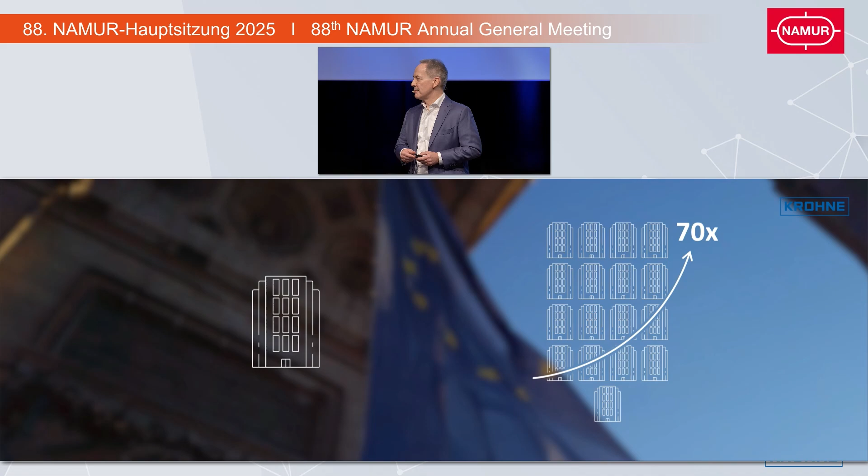Our innovative capacity is lagging behind. Compared to its GDP, the EU only invests half as much as the United States, for example. As a result, 17 times as many large corporations were created in the US as in the EU over the last 50 years, with their market capitalization 70 times higher.

And what's behind this difference? A greater willingness to take risks. What we need here is a fail-fast mentality that allows for rapid iterations and experiments, rather than trying to create rules for even the most minute detail in advance. Unfortunately, a safety-first mindset, when exaggerated, can lead to bureaucracy, which slows us down.

The EU is the leader in regulation. 13,000 new regulations were issued since 2019, compared to 3,000 in the US. What we need is significantly more venture capital and a culture that accepts entrepreneurship and failure as a learning process instead of stigmatizing every mistake.

And finally, we need to make sure that the excellence we have in research is tied in much more closely with the industry, so that we can put innovative ideas onto the road much quicker. What can we do specifically in the process industry, Dagmar, to ensure long-term productivity and profitability in Europe?

In the process industry, we need to invest intelligently and purposefully in digitalization and AI-supported process optimization, leveraging the existing wealth of data. This will enable us to increase the efficiency of our plants in Europe and offset at least part of the higher energy costs.

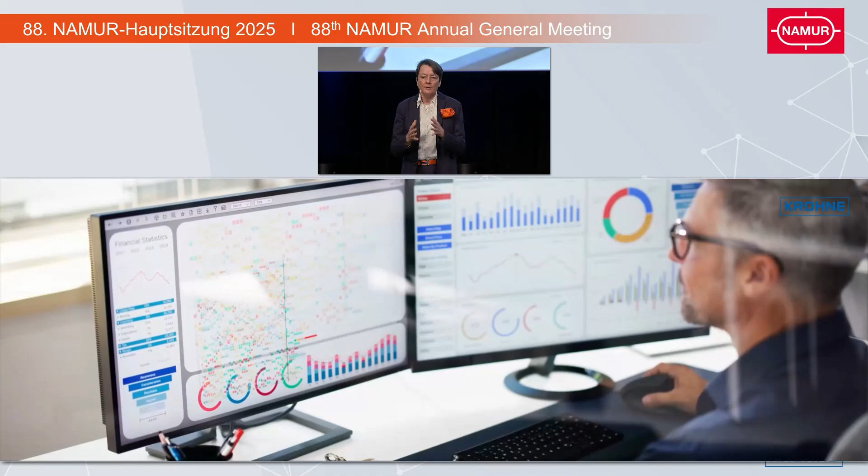Another way smart systems promote efficiency and productivity is by freeing up expert capacity, by relieving specialists from routine and bureaucratic tasks, so that they can concentrate on activities that create value and increase productivity.

Modern systems afford us an opportunity to break down silos by improving data transparency, making data visible from production to administration. They create a consistent basis for communication, where previously there were many different isolated solutions. Of course, AI is not the cure-all, but it can certainly help.

What exactly do we have to do? We, as companies, need to strengthen our innovative capabilities.

One way to do this is by forming strong partnerships between companies and research institutions, as KROHNE does, along with players such as Evonik, Lanxess and many others. And one of the most powerful partnerships is NAMUR.

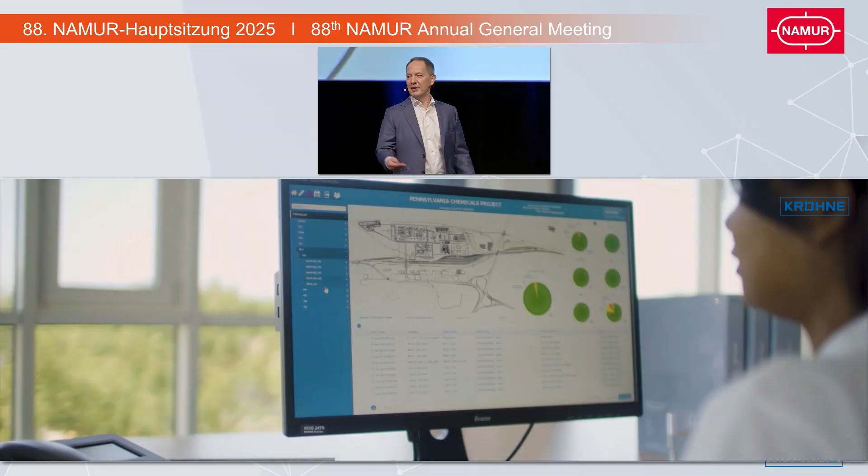The standards we develop together are invaluable. Just think of modular setups with standardized interfaces according to NAMUR MTP, or networking in the field with the help of the advanced physical layer. Without APL, the NAMUR open architecture really isn't much fun.

However, with all these technologies, we're still far from being autonomous. What milestones, Dagmar, do we need to achieve for autonomous operation? We discussed this with a number of representatives from the chemical industry and defined three crucial milestones.

The first one is connectivity. That's the basic prerequisite for complete digitalization and networking. What it means is the seamless integration of all field devices, sensors and actuators into one communication network. Without such a digital infrastructure, all further steps would become extremely difficult.

We need systems and plants that offer sufficient power in the field, and interactive measurement and control devices that can be integrated. The second milestone is what we called beyond diagnostics.

Of course, many of us currently don't have the money available for large investment projects, but that's exactly why we really need to exploit the potential for efficiency gains now, for example with plug and produce for field devices, simpler system integration, and predictive maintenance.

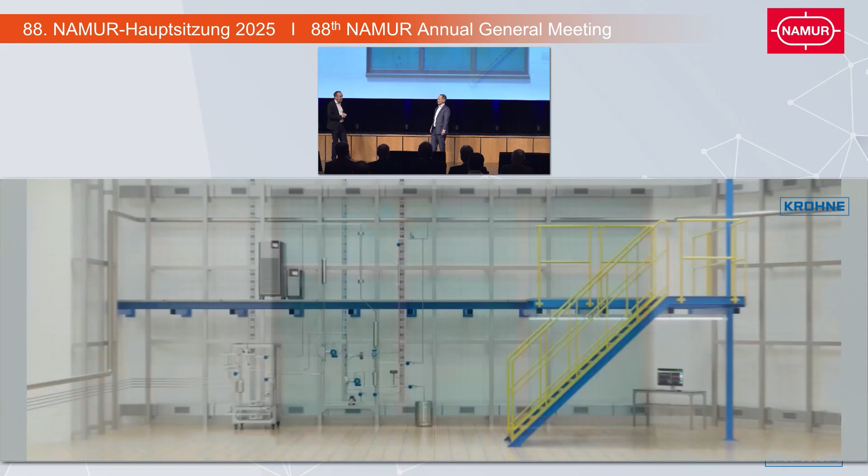Thomas, you've brought us an example that may be typical for countless similar plants in the chemical industry. Absolutely, Attila. It's a classic technicum system at Evonik. What does technicum mean? Well, technicum is a technical center where process engineering processes can be developed and optimized in a test environment.

And how does such a technicum benefit you? Well, we need to become faster and more efficient in optimizing our production plants. The technicum is one way of achieving that. It allows us to glean as much information as possible through a limited number of tests that we can run. It will increase the amount of information in future.

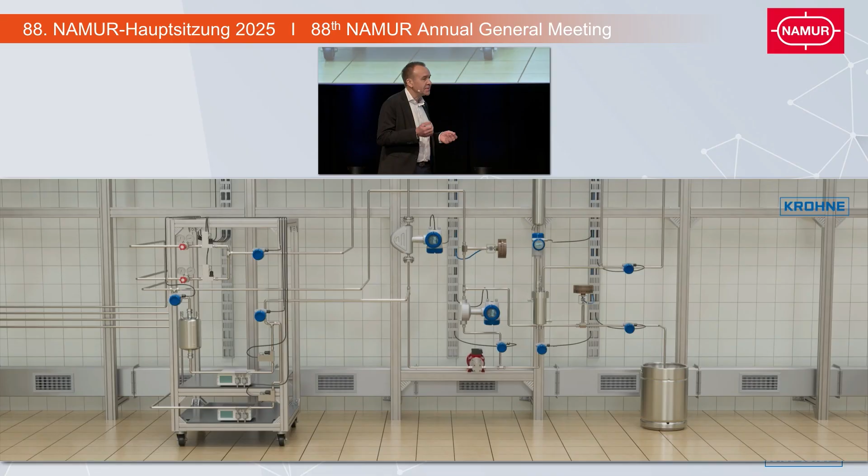Well, that sounds really great. Which process are you testing in this example? In this example, we're testing a catalyst process. The aim is to react as much hydrogen as possible with a liquid via a catalyst. In order to do this, hydrogen is fed into the liquid under high pressure. This creates gas bubbles. For a stable reaction, it's important that the composition of this multi-phase flow remains constant.

And how do you ensure that? Through continuous flow measurement. For this process to work well, we need a high flow velocity, which produces small gas bubbles. These small gas bubbles in the multi-phase mixture must be reliably detected by the measuring device. If the mixture is correct, then the measuring device displays a green light. And what happens if the flow velocity becomes too low?

If the flow velocity is too low, the gas bubbles are larger. That, of course, reduces the reaction surface on the catalyst, and this is a negative impact we don't want. The measuring device is now used to accurately detect such a situation, and it does.

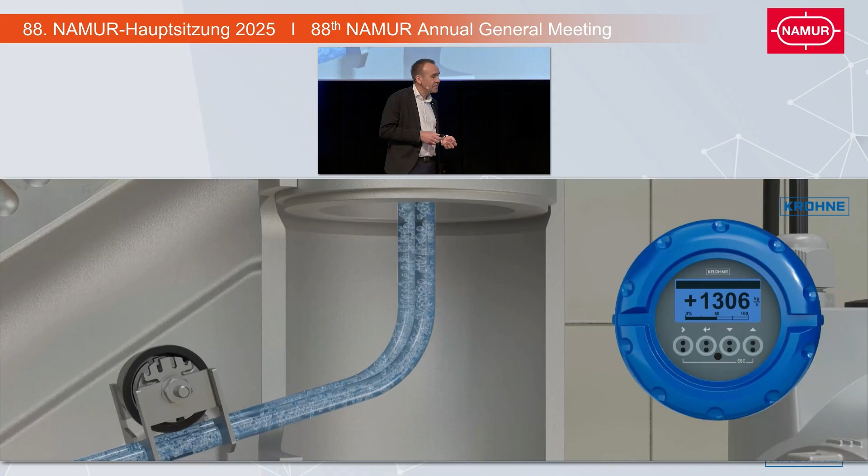What we can see here on the blue display, and I think that's quite amazing. We've got a multi-phase mixture, and the modern Coriolis measurement device can measure the liquid with the enclosed gas bubbles so precisely and reliably. Yes, measurement technology has made a leap in progress.

Indeed, a lot has happened, enough to automate a single process. But at the technical center, we're taking things one step further. We want even deeper insights into the process, and that's why we build these systems. And how do we gain these deeper insights?

More data, much more data. So more sensors? Yes, that too. But it's not just that. We don't just need the data, or the systems to gain data, we need them to control the process.

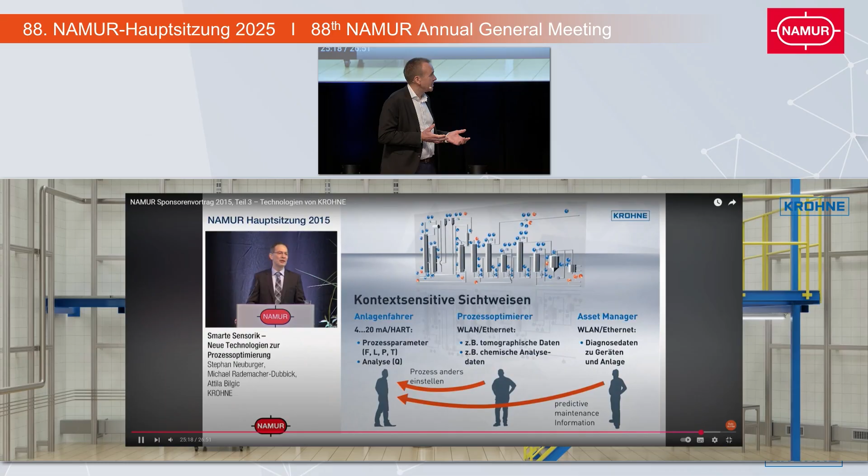We are now using what we basically initiated 10 years ago with your presentation on NOA and APL. Both technologies are now mature and available. But we're not using the technologies to their full potential, I believe. The data that they make available, in order to unleash their full potential, we need to enrich them with context from the start.

Okay, well, let's take another look at the technologies in question. NOA aims to make production and device data easily available and safe to use, especially for plant and device monitoring, but also for optimization.

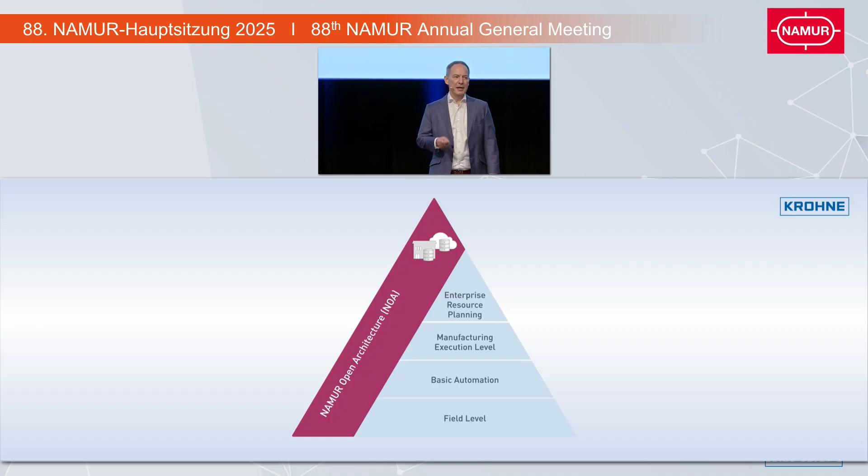Core automation, with its 4 automation levels, remains largely unaffected. The transmission of production and device data this way bypasses the automation levels, taking data either directly to the cloud or an on-premise database solution for further processing.

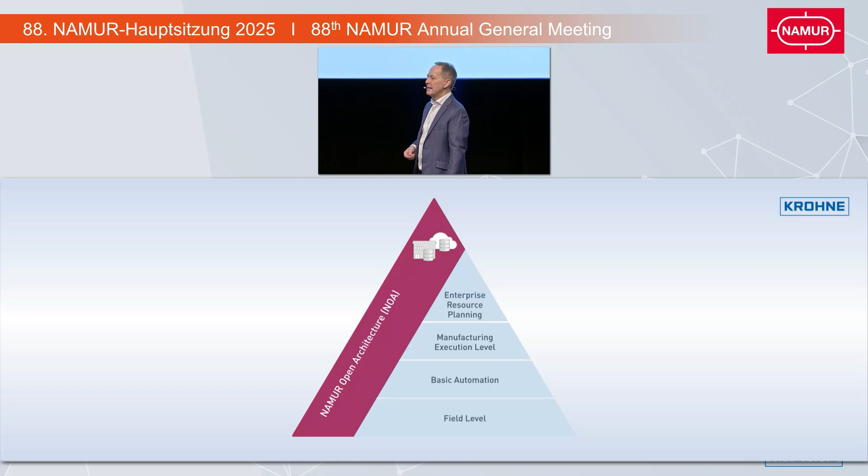NAMUR and APL with Profinet have been around for quite some time. But to support you in your goals, we have also implemented APL with OPC UA together with Phoenix Contact in your technical center. Can you explain in a bit more detail what we did there?

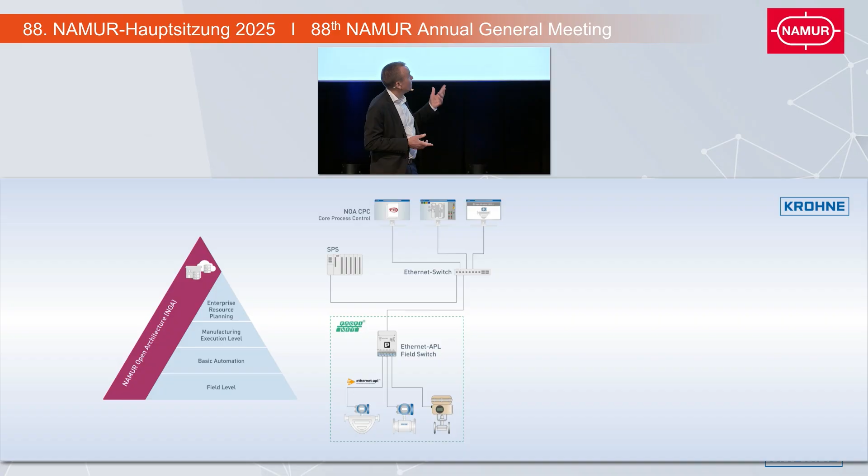Oh, of course. Let's take a closer look at the automation topology here. We equipped part of the plant with APL. APL enables the use of modern protocols such as Profinet or OPC UA.

In our technical center, the values we measured and the device data are transmitted via Profinet through the APL switch to the control system and the master control system.

What's new and what we've now implemented is a second channel. The second channel uses the OPC UA protocol. OPC UA also runs on APL.

KROHNE, and this is the innovative part, has implemented an OPC UA server directly into the field device. This allows for the structured, secure and manufacturer-agnostic transfer of device and process data, completely bypassing the different automation layers. Later, we will also do this with PA-DIM.

The big advantage is that with this example that I'm showing now, data can be fed directly into an SQL database where we evaluate the data in parallel with the control system with the help of Grafana.

Oh, thank you for this explanation, Thomas. At this point, a quick note: we have also implemented the gas bubble detection system on a demo model directly on the left-hand side of the exit, so feel free to take a look.

But Thomas, when planning the system, you wanted part of the instrumentation to be implemented with a 4-20 milliampere connection for various reasons. Could you briefly explain how this works in parallel with the APL installation? Well, gladly. We still, of course, have devices in use that need 4-20 milliamperes.

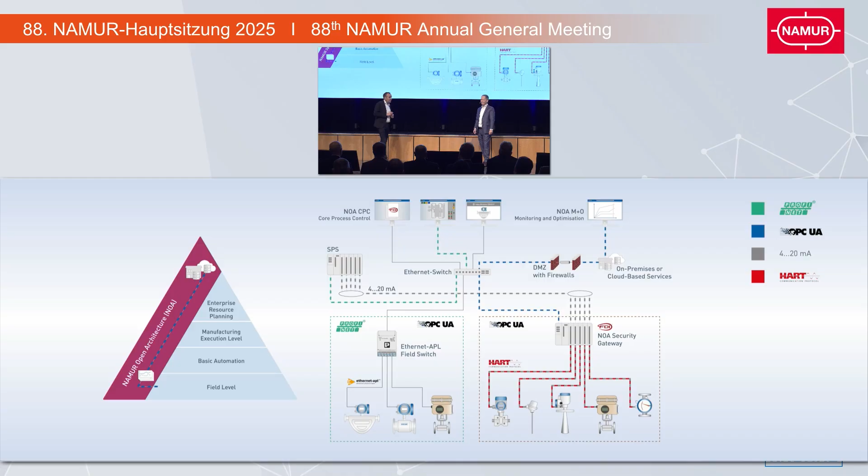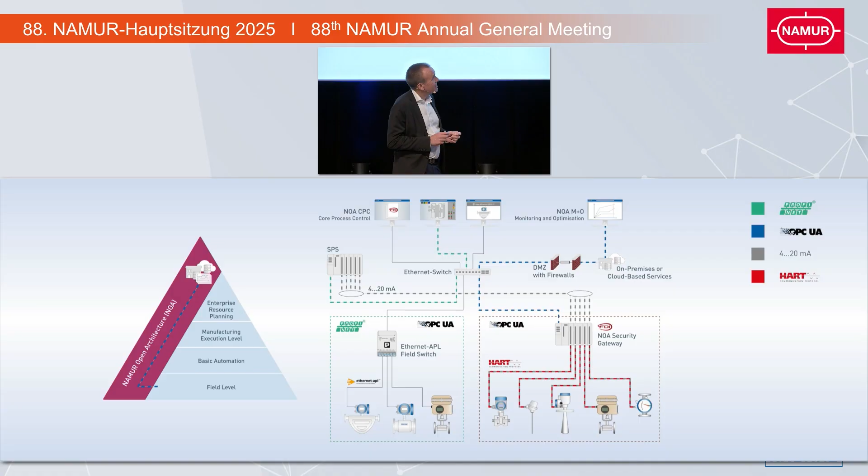Well, basically, no. The data we transfer with Profinet is actually identical to the data we transfer with OPC UA. But first, Attila, maybe we could briefly explain what data we're talking about. Okay, so we have an example here of a Coriolis device as an example.

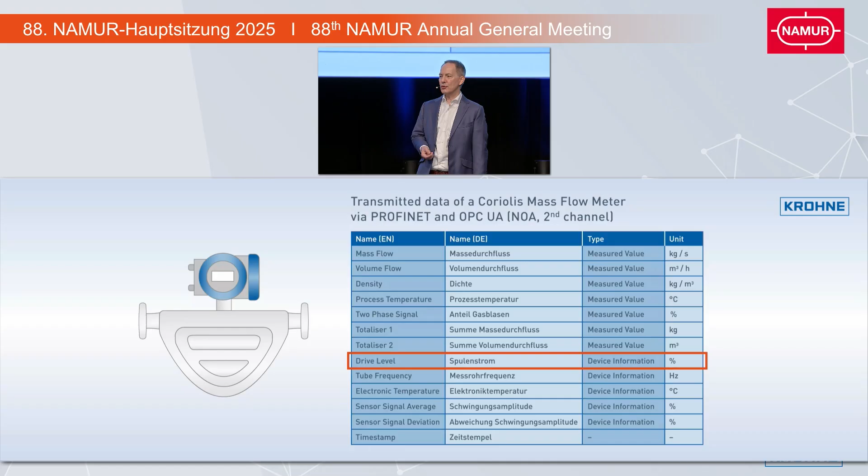Data includes both measurement results and device internal information, such as the coil current, which could indicate a change in the viscosity of the medium, or data on the gas content enclosed in the medium. So we're talking about both device and process data here.

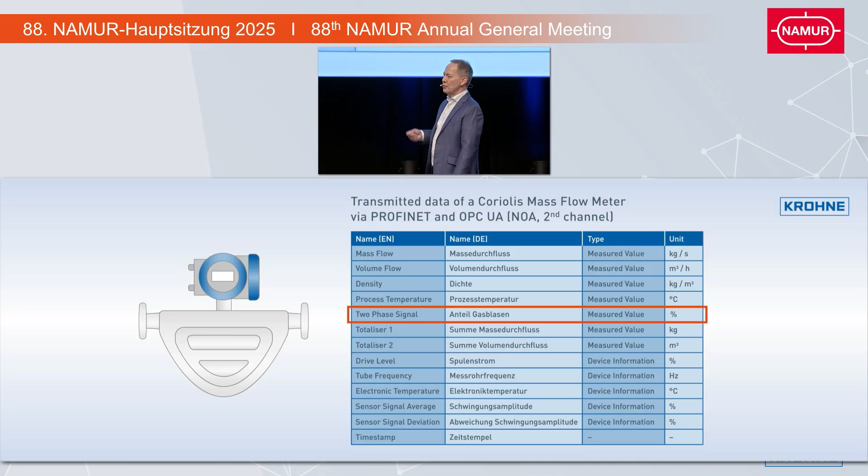But you just said that we can transfer the same data via OPC UA and Profinet. Where's the advantage? Well, in the vast majority of cases, not all of this data is stored in the control system, as the effort involved would be far too great, and the data is not needed for the process control system. But now, with the NAMUR Open Architecture, we have all the data shown here and can transfer it directly into the SQL database for evaluation.

Well, that makes sense. And what happens to the data? Well, in the first step, we have now gained significantly more information from the existing measuring devices. In addition, with APL and OPC UA, we have the option of easily integrating additional field devices that are not directly required for process control, but for data acquisition.

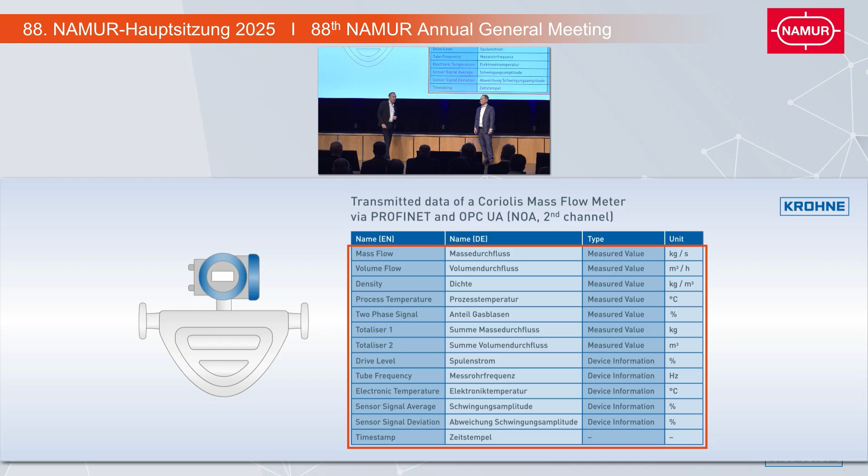This immediately provides us with much more in-depth knowledge about the process we are testing with the pilot plants, and it makes it easier for us to evaluate the data. All the data we glean is evaluated, and we use the findings directly to improve the processes while they are still in the experimental stage. This brings us one step closer to our goal of chemistry controlling chemistry.

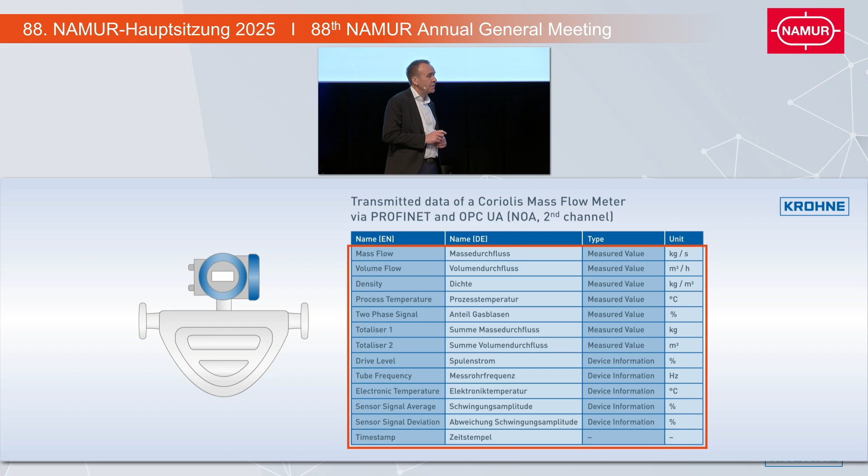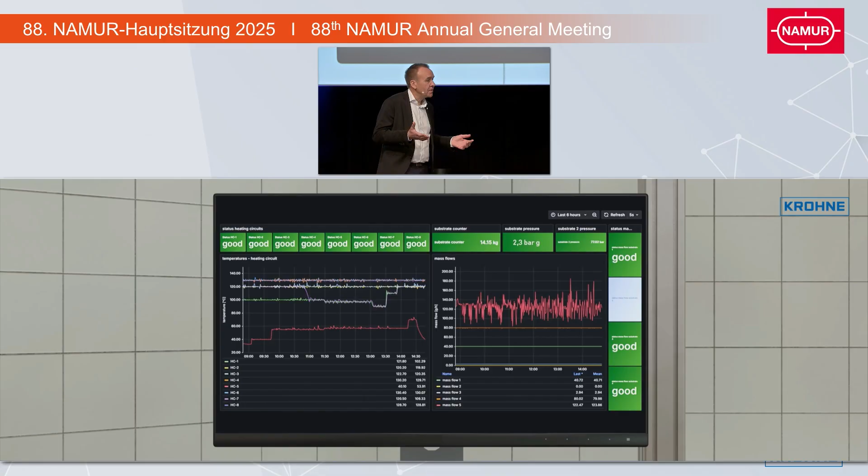To better understand how these changes in data are linked to changes in chemical processes and what influences these changes, that needs not just analytical effort, but also intuition and experience. And this is where artificial intelligence can help us with a huge amount of data to identify the correlations and interplay which we need in order to make process adaptations faster and more purposeful.

So, Thomas, what's the conclusion from this? Well, Attila, the conclusions are always drawn at the end. In principle, all the additional information that we can now gain gives us much, much deeper insights into what's happening at a chemical level. And this is what is going to take us to the next step.

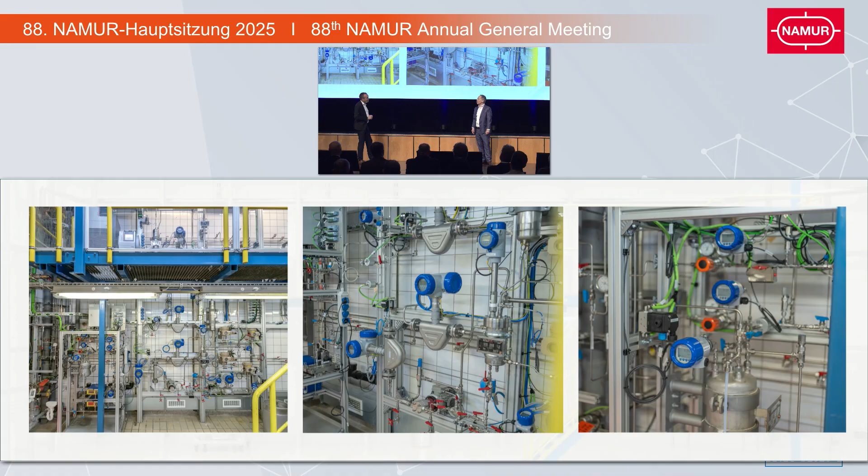Well, thank you for taking us to your technicum. And we can see images of it here. And thank you for joining me on stage.

Now that we've talked so much about technical possibilities, let's take a look at a very specific technology. Another one we've been talking about for over 10 years, the asset administration shell. The asset administration shell is another crucial building block on our way to interoperability and autonomous plants.

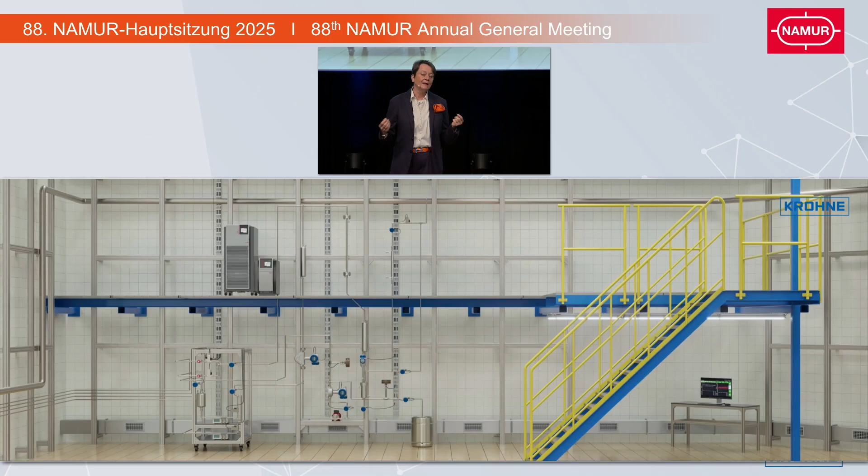Dagmar, what exactly does the asset administration shell have to offer? The AAS finally offers us the opportunity to easily install devices and instruments in plants and manage the related documentation throughout the life cycle in a very easy way. Taking it one step further, the asset administration shell will also allow us to almost immediately and automatically integrate devices at every level of automation and control.

Again, Dagmar, do you have a practical example? Oh, yes. Let's take another look at the flow measurement in the pilot plant. The Asset Administration Shell, or AAS for short, is a standardized digital representation of a physical or logical asset. In this case, we're looking at a Coriolis device.

The AAS provides all relevant information about the entire life cycle of this device in a structured and, what's more important, machine-readable format. Think of the asset administration shell as a container that is usually composed of a large number of submodels. And this precisely is what makes the asset administration shell so flexible and expandable as well. Each submodel addresses a specific use case and contains all the necessary data for this specific case.

One of the submodels is the digital nameplate. This, by the way, amongst other things, addresses the EU's requirements for the digital product passport.

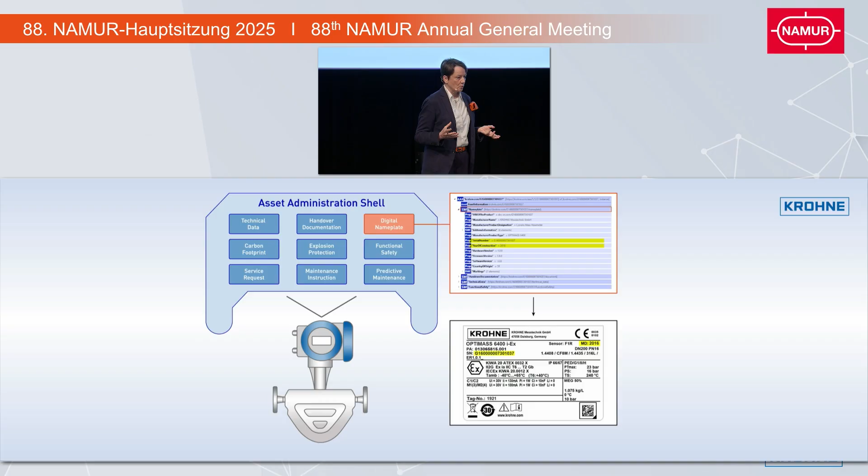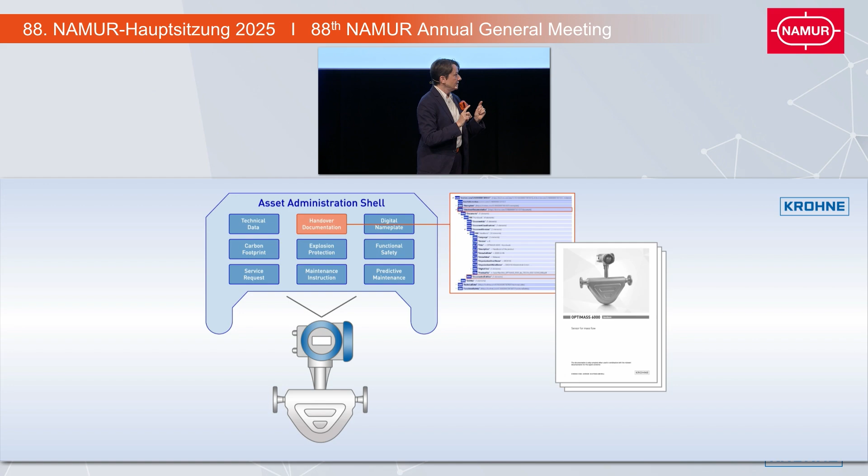Another central submodel is what is called handover documentation. This submodel contains the entire documentation assigned to the respective device: calibration and material certificates, operating instructions, data sheets, approval documents, and similar types of documents. For each of these documents, a complete set of metadata and categorizations is stored, allowing the operator to automatically file each document in the appropriate place in their document management system in an automated way. This does not only save time, but it also prevents errors.

So the asset administration shell is a very important information tool. Well, not just that. It's also not a one-way street. Data can also be written back from the corresponding assets to the asset administration shell. Data on modifications, on maintenance, repairs, for example, can be stored in the shell in a machine-readable format and written there. This means that operating personnel has access at every time to all the relevant information about a device. During recalibration, for example, the person performing the examination and the calibration can see all calibration stamps since installation. Well, how does that work?

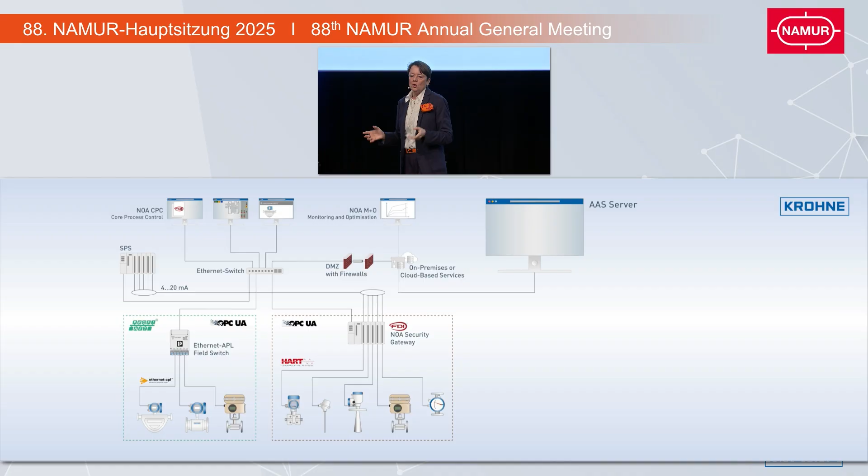Okay, let's take another look at the automation topology at the Technicum plant. And now we add an AAS server that you can see at the top right corner here, clearly located in the operator's IT landscape, securely separated from the OT. As a rule, the operator will store all asset administration shells there.

So the first use case is the installation of a new field device. Yes, and when a new field device is delivered, it is scanned at goods receipt via the identification link. And we can see this here in the bottom in this little animation. This automatically triggers a process. The submodels of the asset administration shell are imported from the supplier's AAS server to the operator's AAS server.

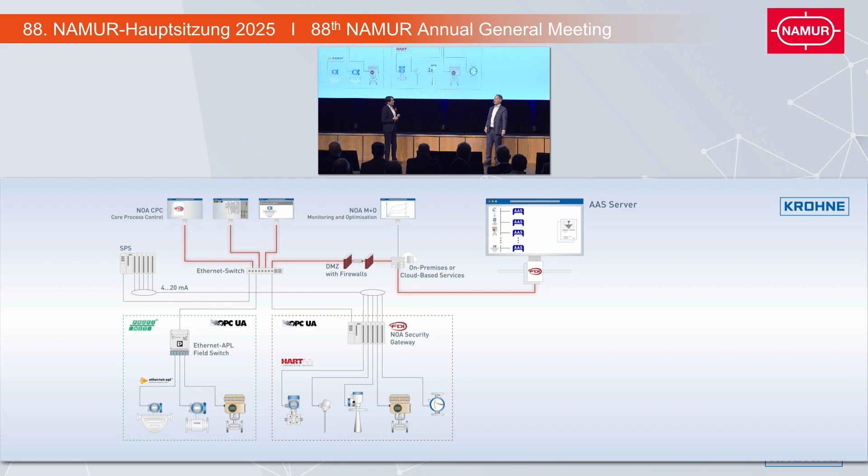Next, all the contents of the submodels that have been released are automatically stored in the relevant automation systems. For example, the asset management system of the operator is updated with new documentation, or firmware updates are delivered directly to the field devices. This happens fully automatically without the operator having to manually trigger these processes. Simply by connecting the new field device to the APL switch, it makes itself known to all the other relevant systems via OPC UA. And what's the return path for the flow of information back?

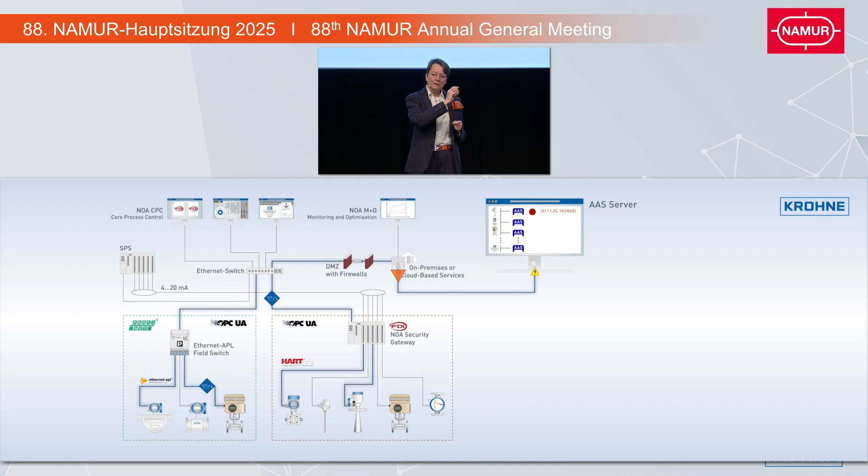Well, for example, critical status data can be written back to the asset administration shell during operations. This means that in accordance with NAMUR Recommendation 107, the device statuses can be stored directly from the field device into the asset administration shell in the plant asset management submodel via APL and OPC UA. Communication with the AAS server is accordingly bidirectional, allowing the asset administration shell to unfold its full potential.

And how does the asset administration shell support repeated calibration in an external laboratory? It can, absolutely. Calibration by a service provider is a challenging example of a life cycle instance where data need to be stored. Let's take a closer look. The field device is immediately identified in the service provider's control system at the calibration laboratory. This is done simply by connecting the APL switch via OPC UA.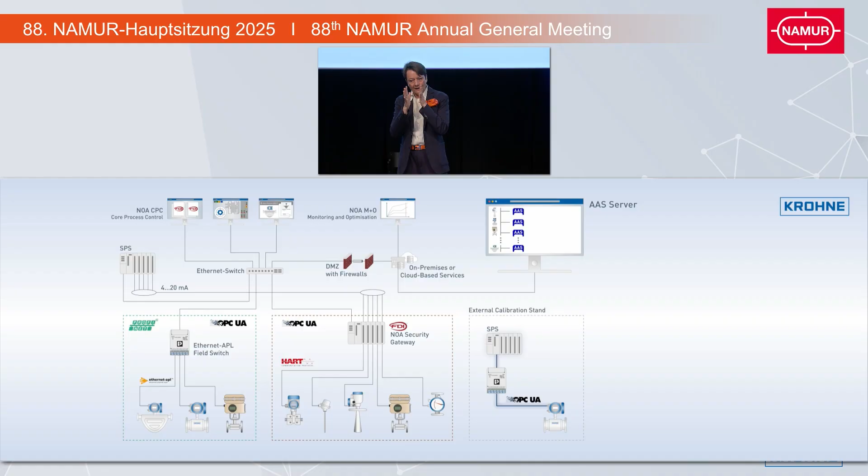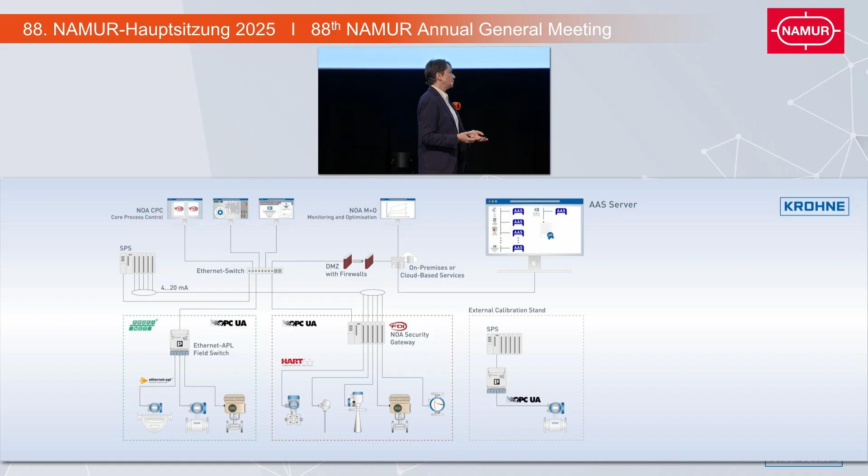The system obtains all the data required for calibration directly from the device's AAS. To do this, the operator grants the service provider restricted access to the corresponding submodel. After the calibration process, the calibration certificate is generated in a machine-readable format and is automatically stored on the operator's AAS server. All service personnel now has immediate and unrestricted access to it.

Wow, that simplifies matters immensely, but it does pose questions of IT security. Well, at least we can reduce the source of error known as human error with it, but you're right about IT security. But the next part of this presentation will deal with another form of security and safety, functional safety, the direct protection of people and the environment.

And of course, in context with functional safety, the question is, how can more information, more data that we can gain from an asset administration shell support and promote functional safety? So how can an asset administration shell make operations more simple, make it safer, and particularly more autonomous?

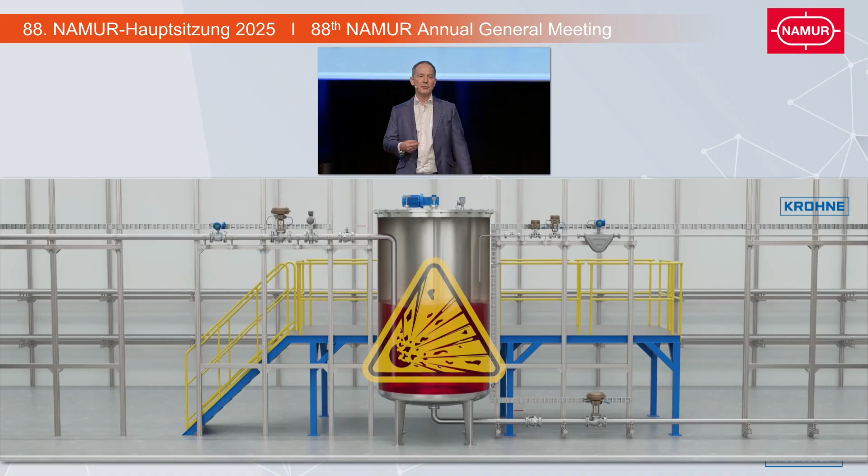Okay, let's look at one practical example of this. Concentrated sulfuric acid is used as a catalyst in the production of high-octane fuel components. An overdose of the acid can lead to safety-critical situations, in the worst case, to an explosion due to an exothermic reaction.

To ensure exact dosing, safety functions often have mass flow meters. When you exceed the predefined limit values, the safety control will automatically steer the emergency shut-off valve in order to interrupt acid input.

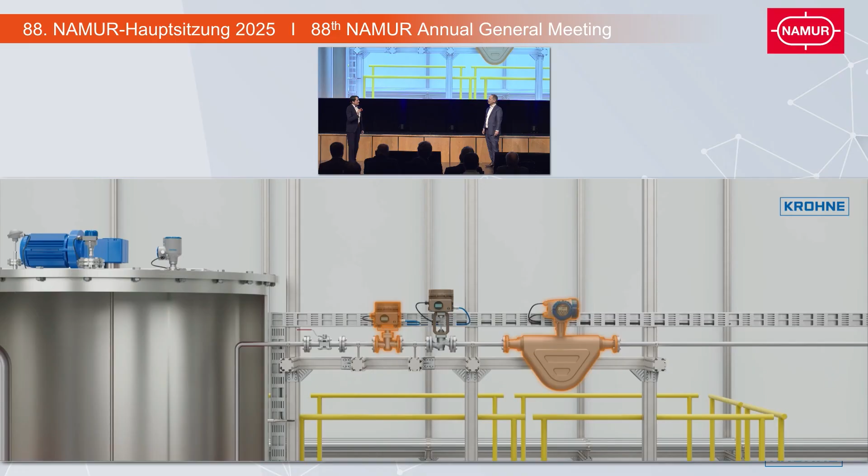But how can we make sure that the safety function is sufficiently reliable? Well, safety functions are subject to periodic tests, which are prescribed by law. In the event of a fully fledged inspection, both components, shut-off valve and flow meter, have to be removed so that they can be tested with regard to their correct functionality on test benches. The amount of work is immense and it requires production shutdown.

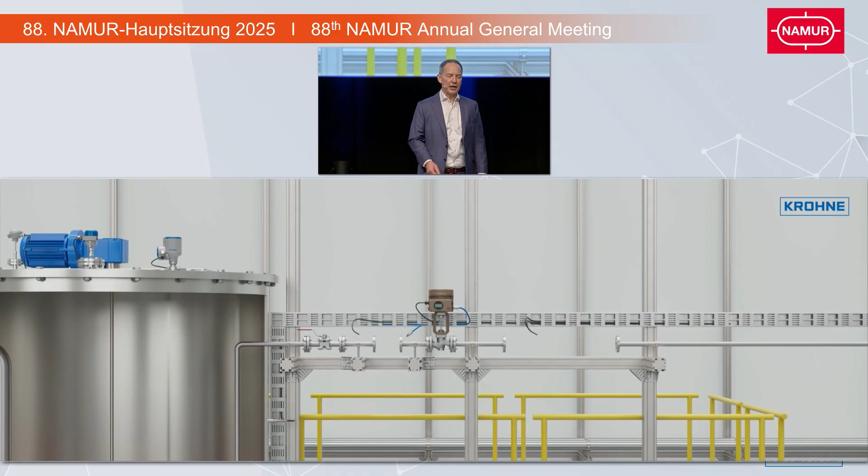For this reason, for measuring devices and actuators, so-called partial tests were developed, which can run the safety control automatically. On the screen, you can see the presentation of a safety loop, a safety circuit, for the implementation of a safety function. It consists of a measuring device, a shut-off valve, and a safety control.

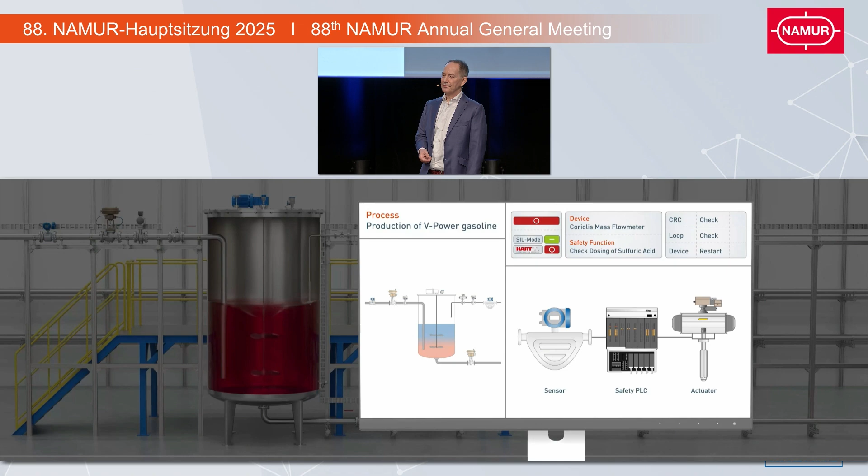Traditional field devices in SIL operation do not allow for HART communication in order to protect devices against non-authorized changes. Modern field devices, however, offer the option, namely that a safety control, even in SIL operation, can be activated via HART. It is now possible for a safety control to put SIL devices in simulation mode.

This is how current loops can be automatically tested, including the complete wiring route. A new start of the device is also possible, in the course of which further integrated test algorithms can be run in order to verify the status of the device.

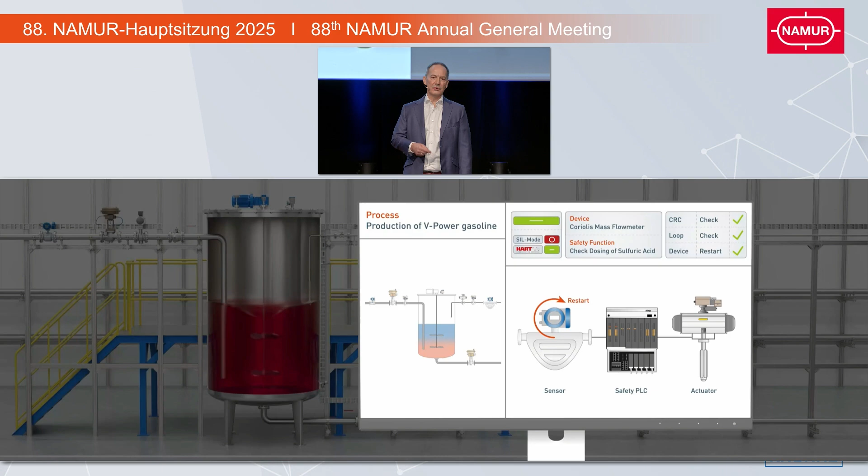This automated partial test allows for a high level of testing of 70 to 80%. And this contributes to a situation where intervals of the fully fledged test, in which devices have to be removed and tested on a test bench, can be considerably extended.

The operator, for example, could look at the history and the results of the periodic tests of individual components and can then proceed to an evaluation. Predefined statistics can be viewed. The history of the individual periodic tests can be viewed.

The operator can also see if under certain process conditions typical errors occurred, or how frequently certain parts of the plants and the system were requested. The operator can also look at statistics of complete safety circuits in a certain part of the plant, evaluate it and answer the following questions.

Under certain process conditions, are there frequent critical situations in which safety circuits were triggered? Or was the plant run too close to safety critical limits? Or were there certain processes in which the periodic tests identified frequent errors of individual components?

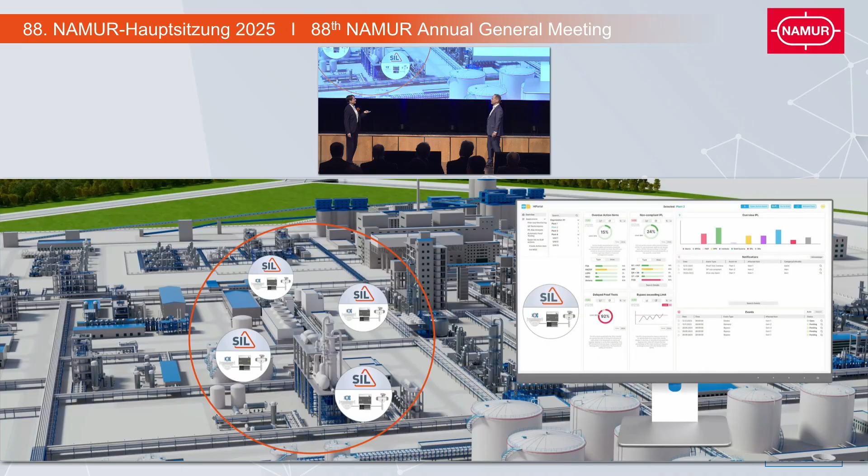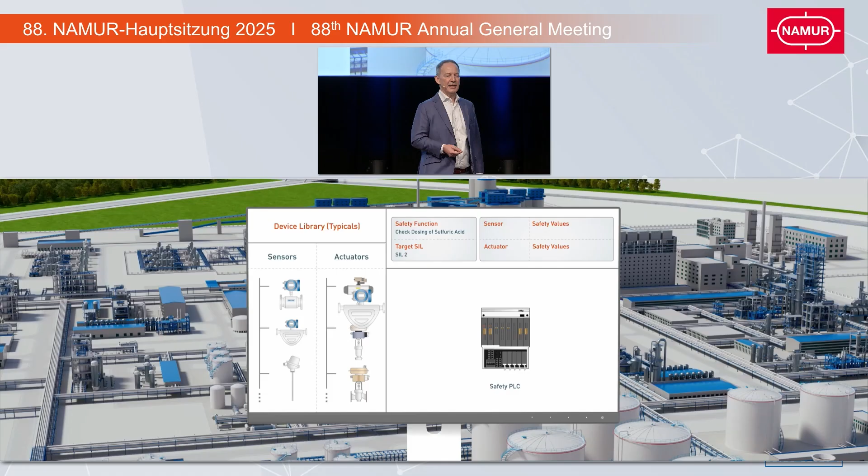Sounds good. But you were talking about a second thought you wanted to share. Absolutely. In the second thought, it is about automated composition and calculation of safety circuits and the connected proof. After the risk analysis has been done, after the tasks of the safety functions have been described, we can then propose a structure based on standardized components, so-called typicals, in an automated way.

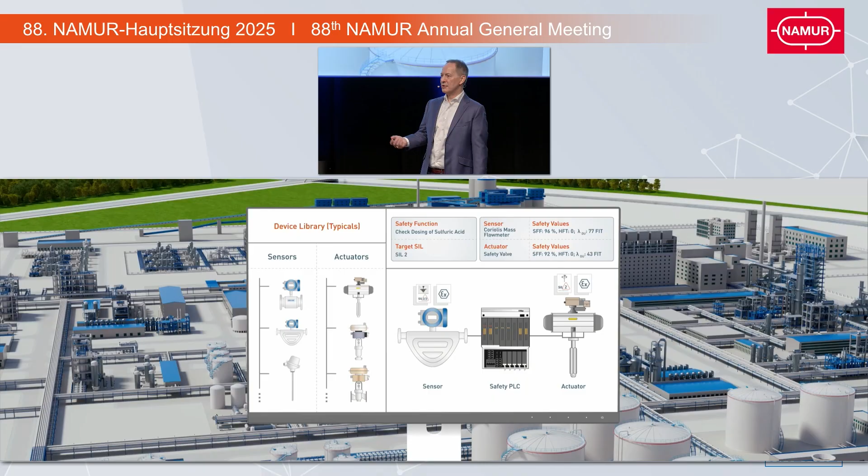Measuring devices and actuators bring along all safety-relevant data via the AAS, as, for example, the application-related error rates, SIL evidences, and Ex evidences. This allows an enormous amount of time saved in the planning and documentation of safety circuits, and at the same time it reduces systematic errors. In the coming years, we also see a crucial further development towards AAS for the functional safety aspect. There is a proprietary AAS for each safety circuit.

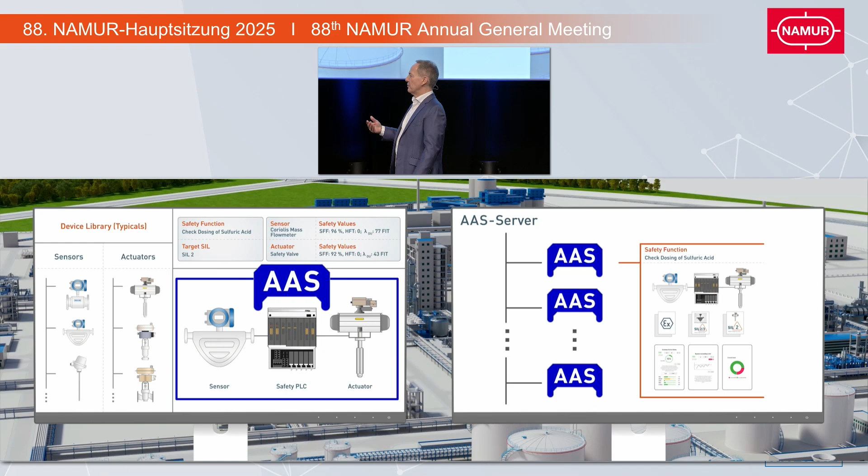In this administrative shell, all the relevant data are stored: structure and calculation of the circuit, all the proofs of the individual components, test instructions, and more. The results of periodic tests, current events, and construction changes are also stored here. This means the comprehensive documentation and history of the safety circuits are combined at one point in the administrative shell.

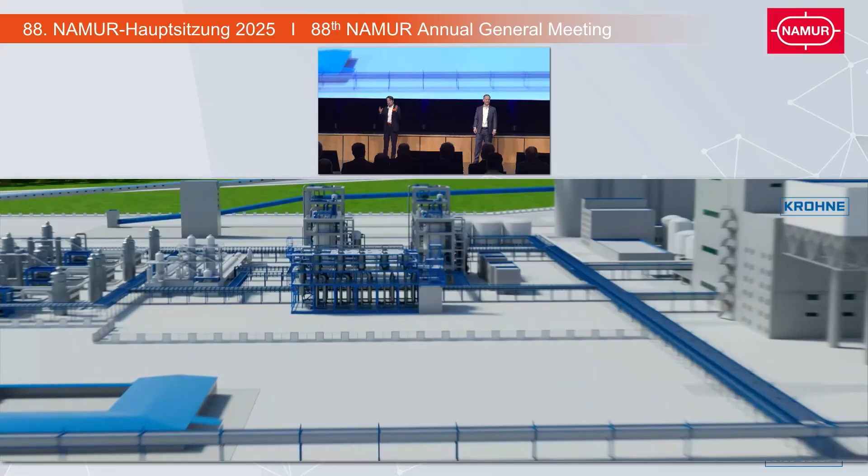We've talked a lot about numerous technologies which can easily be used in the greenfield. Do we see opportunities to use them in the brownfield as well? Or do we need to invest millions? We've got a really wonderful example we brought along, one which demonstrates a step-by-step approach.

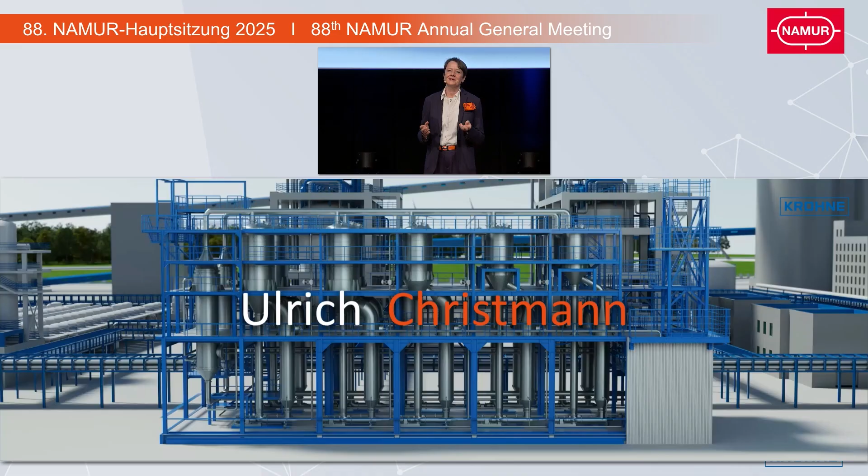Now, for a more detailed insight, we would like to ask Dr. Ulrich Christmann, the Head of Global Automation and Digital Manufacturing with LANXESS, to come on stage. Please, Ulrich, join us. Hi Ulrich, it's good to have you here, thank you very much for your support.

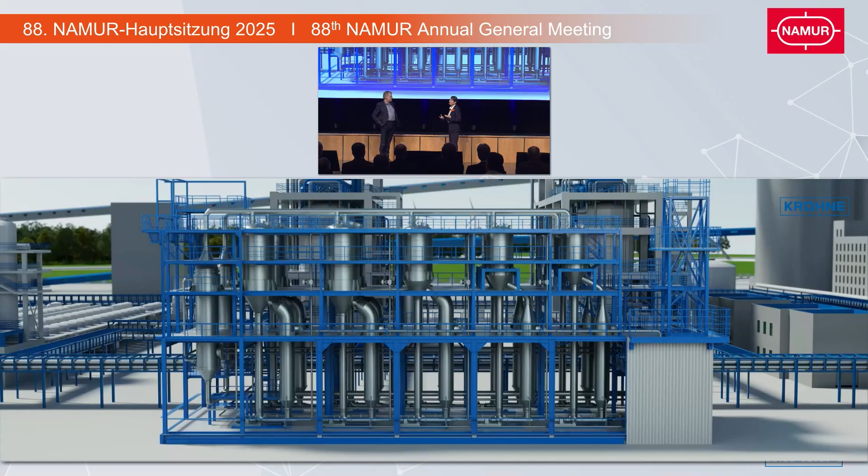Can you briefly explain to us the TMP system and the process? Hi Dagmar, yes, I'm pleased to do so. TMP is mainly used in the production of resins, plastics and paints, and it comes about in a multi-phase reaction in aqueous phase.

And what is the challenge? In producing the target product, TMP, salty secondary components come about. The salts dissolved in the aqueous phase lead to a situation where the heat exchanger is subject to clogging and fouling in the evaporation stage, which often leads to downtimes. And it costs money, doesn't it?

What about control? How does it work now? The data produced in the running system are not totally used for information purposes. From a technological point of view it would be possible, but the flushing today is started by the operators based on their experience.

A comprehensive data evaluation can be a basis in this process to optimize process control. That is our target. In a first step, we want to cut the process steps by half and move towards partially autonomous production. And what are the challenges in the process?

There are numerous challenges, since it's a complex reaction with high water content. This water content has to be evaporated over several stages, most efficiently, continuously, and in a trouble-free way. However, energy requests and the input at the inlet fluctuate, because the steam is not only recuperated from the network or the grid, but for energy-saving reasons also from other process stages.

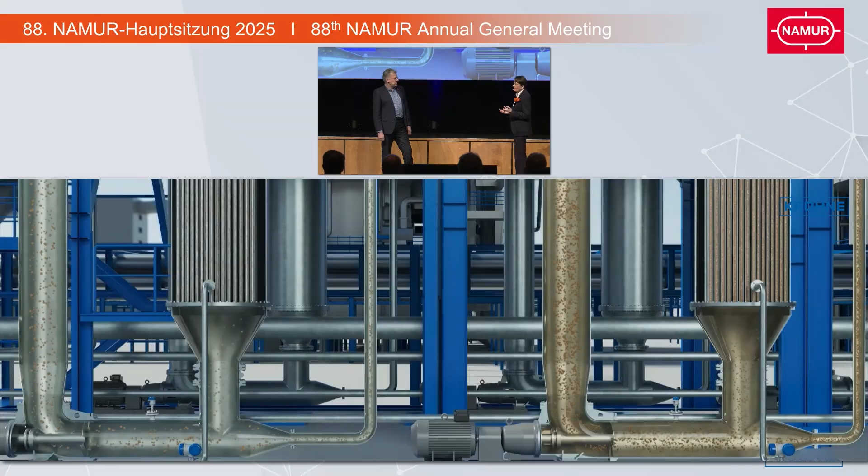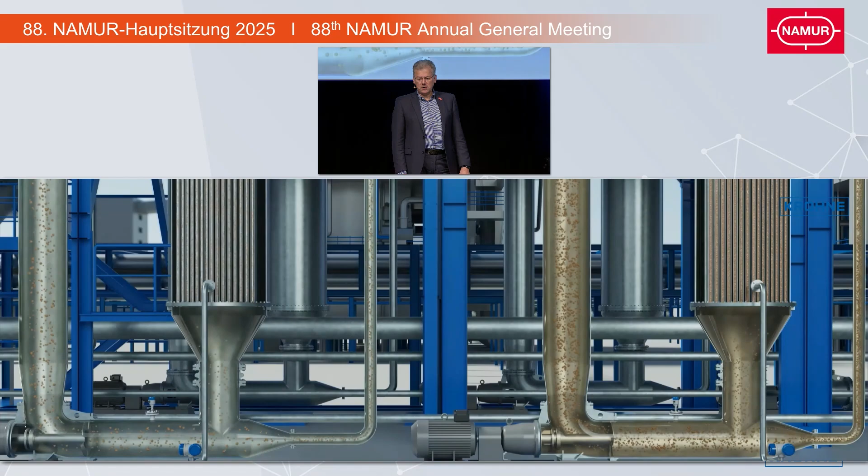Now you see the fouling characteristic at the heat exchangers here, and it's obvious what kind of questions you needed to answer at the beginning of the project. Yes, absolutely: how fast is the salt deposit in the heat exchanger generated, and what is the energy loss in the processing? On the basis of existing data this could not sufficiently be answered, which is why we identified additionally requested data and readjusted instrumentation at certain points.

And one of the challenges was the diverse communication landscape, HART, Profinet and Profinet via Ethernet-APL. All relevant signal paths first had to be systematically integrated. Absolutely, and this was the only way we could close the data gap.

The newly integrated devices first provide additional process data from certain hidden areas of the plant, and secondly more comprehensive diagnosis data. This means not only new individual values, but also consistent context-related process data are created. What happens to the data? The extended process data are transferred by TU Dresden and KROHNE into an AI-based analysis model.

The target is the integration of a learning application which recognizes deviations early enough and which can generate adaptive control processes, which is transparent, easy to understand, and has a direct relation to real process parameters.

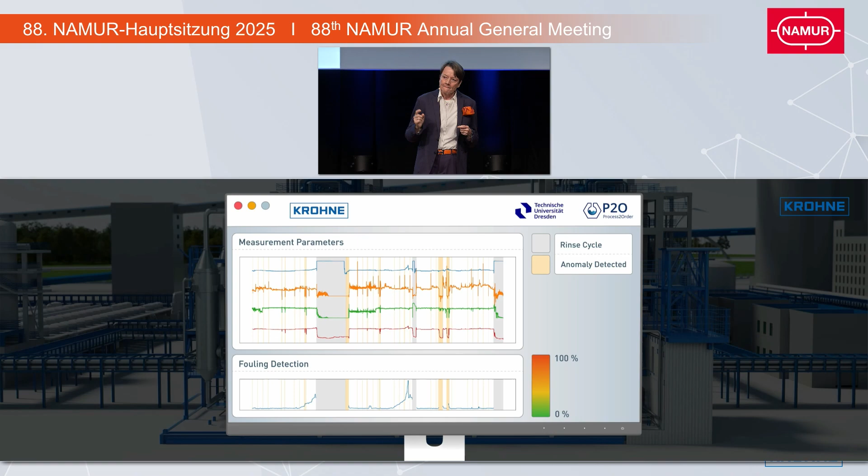One of the deviations that were analyzed is the fouling you mentioned. Here it is about understanding the context between operational statuses and deposit inclinations and evaluating them. What you see in the picture is 4 different process parameters which were used for an AI-based fouling recognition.

It's interesting to see here that on the basis of this data, as you can see at the bottom of the picture, a continuous fouling growth could be predicted. What is shown in light gray is the flushing. With the help of AI, we were able to predict it, although the input data we see at the top did not show any recognizable trends for the human eye.

It goes to show that the recognition was only possible due to the complex correlation of data. Artificial intelligence, and especially modern deep learning, can manage to use technologies like autoencoders in order to learn these contexts. Human beings can then extract that knowledge and use it as a decision-making basis.

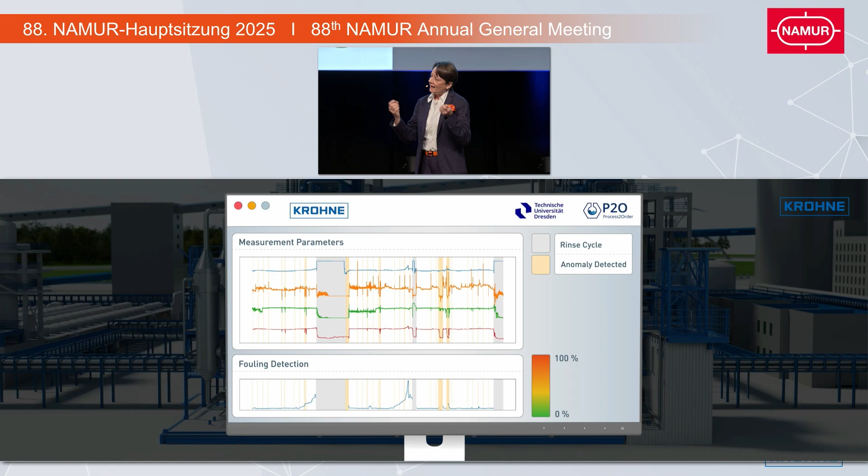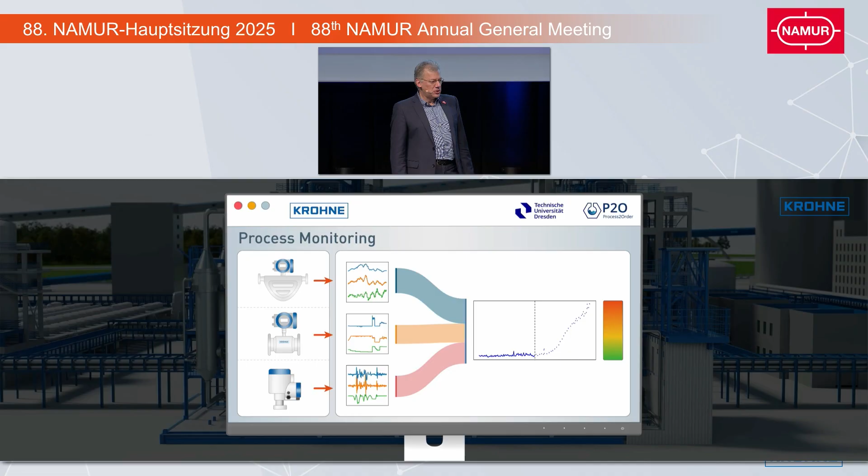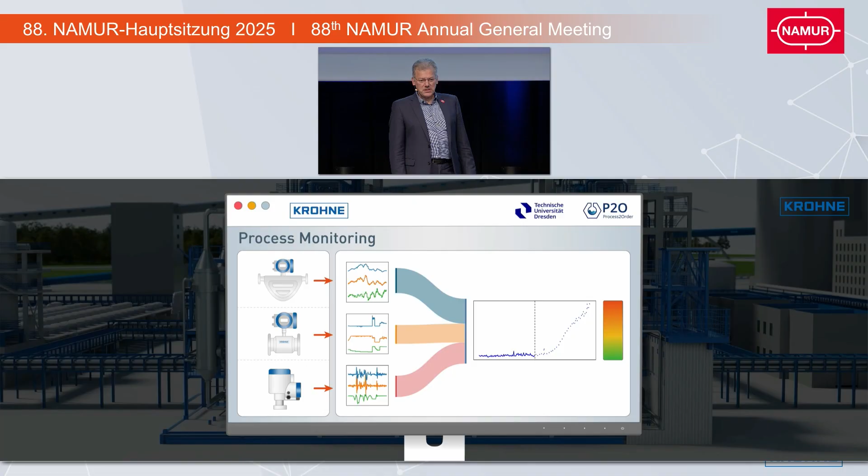Have we seen a first practical success already, Ulrich? Yes, for example, we're able to see that the combination of dosing at the inlet and optimization of evaporation strategy in order to avoid deposits could improve the heat exchanger situation. On the basis of the data collected, the load on the facility and the energy input could be adapted, and we could go for preventive deposit avoidance.

That is milestone number 3, intelligence in every measure. So we generated a supporting system which does not replace the operator, but supports the operator in daily decision-making, especially when it is about complex non-linear process situations.

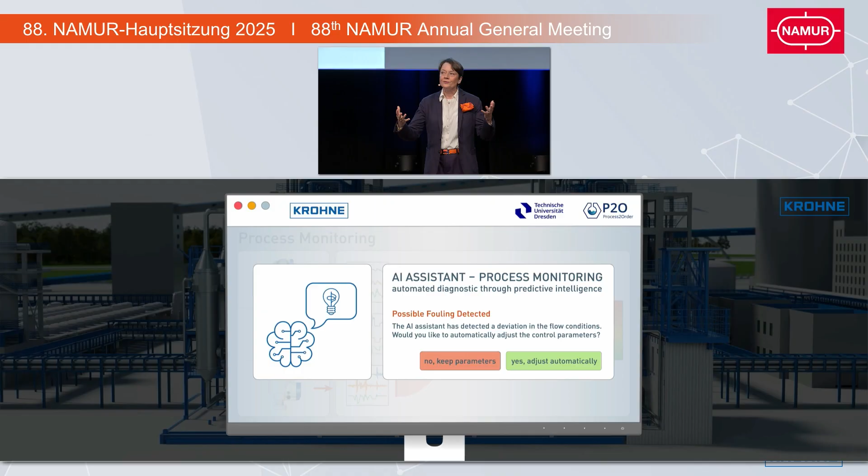An intelligent retrofit with modern instrumentation manages to do more than only spontaneous transparency. It supplies structural prerequisites in order to optimize existing plants on a data basis and to run them in a partially autonomous way. What we start by way of additionally collected data and system communication will be the basis for situational control strategies, energy optimization, and predictive maintenance.

Well, the example shows what intelligent retrofit can do. Yes, absolutely. A brownfield plant—we have a lot of them—has the potential to be transferred into autonomous production.

Thank you very much for giving us the insight and for sharing all the information with us. Thank you very much, Ulrich. It was a pleasure.

Well, after all these excursions into the world of technical opportunities, as they stand today and as they will look like in the near future, Attila, what do you think about instrumentation in the coming 10 years?

We think that instrumentation will continue to further optimize in many, many areas. In other areas, it will be revolutionized, and that has an impact on systems as well. Let me focus on 3 topics here: first, the reliability of the measured value; second, simplified operability; and thirdly, connectivity.

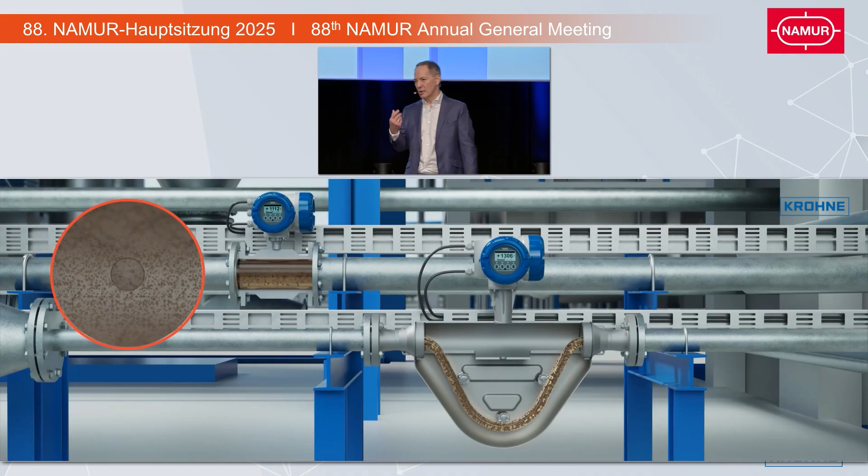In order to further improve measurements, several research projects are ongoing, amongst others some based on AI algorithms. AI allows access to process situations which cannot be modeled in a closed physical or chemical way.

Then, number 2: simplified operability. This is about easy handling of field devices. In the past few years, it was particularly digitalization that gave that area a boost. Field devices can now be parameterized by way of safe Bluetooth connections, and measured values can be diagnosed.

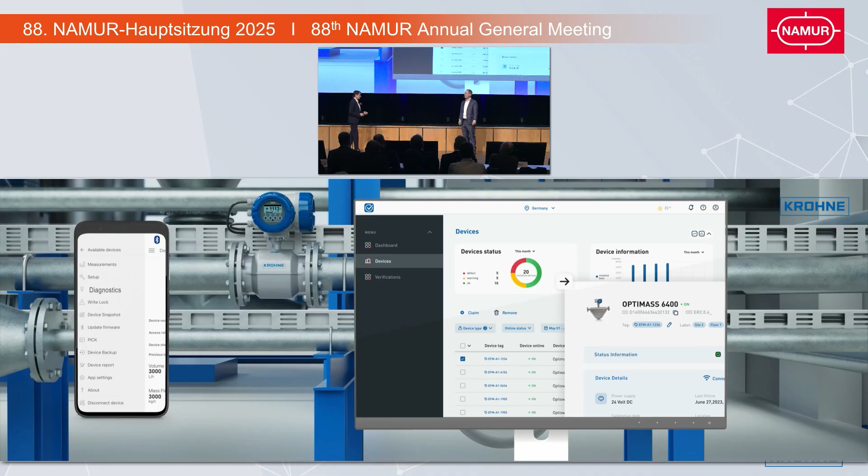Services such as asset management, monitoring, verification, and certification go without saying these days. But, of course, a lot of more smart services can be perceived. The overall documentation management has been digitalized as well.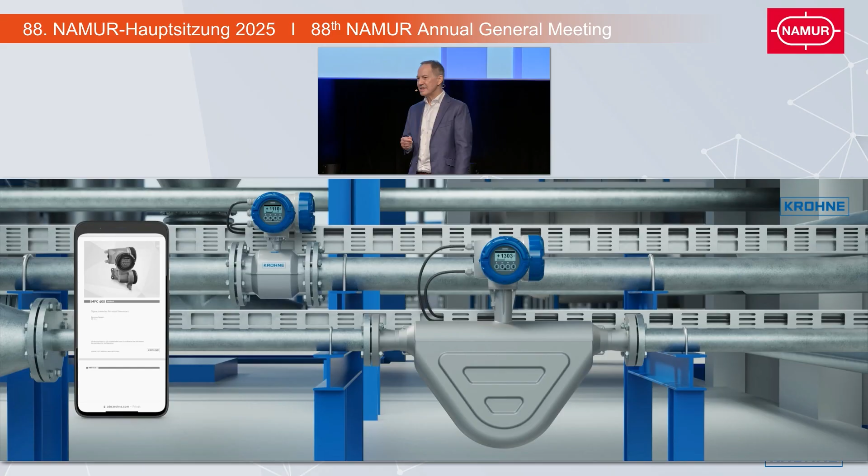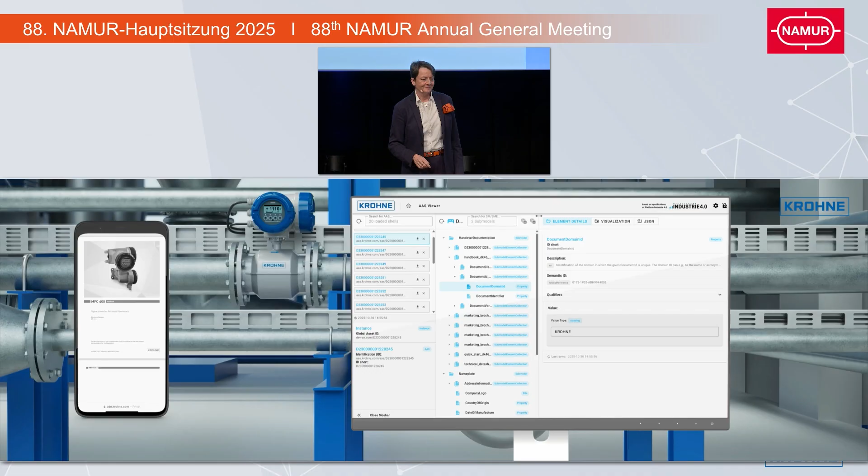The operator only needs to scan a field device via the Auto ID code IEC 61406 and then has direct and offline access to all the documentation concerning the serial number. Such documentation management was already implemented. A demonstration for this and on smart services can be seen in the exhibition.

In the document management, you will also find video-based instructions and installation instructions. That helps to avoid erroneous operations and false installations. Of course, the lack of experience cannot be offset, but it supplies precious support here.

Absolutely, a lot has happened, a lot of progress has been made in order to simplify the operation of a plant. But you were talking about a third point, connectivity. What do you have for us here?

Now, connectivity is about plug and produce of field devices. Just imagine the following situation: 4 o'clock in the morning, a measuring station reports urgently required maintenance or there is a total failure. When the maintenance people replace the device, the Ethernet-APL connection of the new field device has to be connected, that's all.

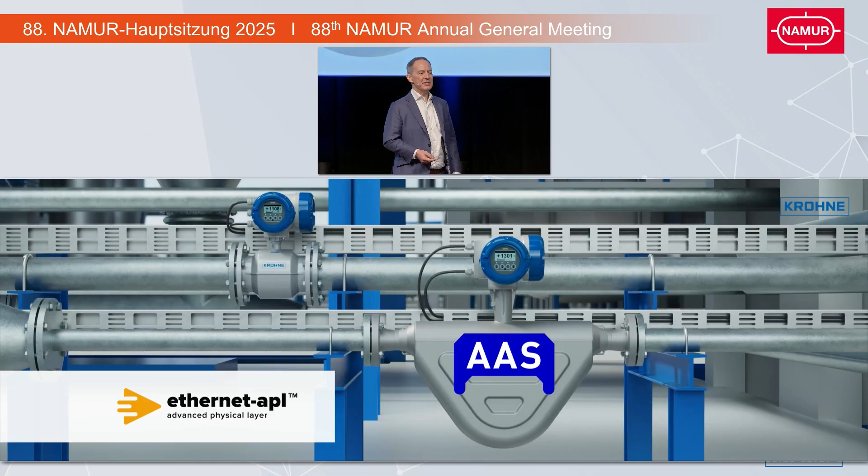with the help of Ethernet-APL online. The information about new patches and firmware updates happens in an automated way with the help of the administrative shell concept. So the future of measuring devices and the future of systems in the process industry can hardly be imagined

without artificial intelligence. In order to better support process industry in future, we must make sure that measuring instruments move away from pure data sources towards information sources and work together with intelligent conclusion tools. Modern measuring devices already cover a plethora of data: flow rate, pressure, temperature, density, conductivity, etc.

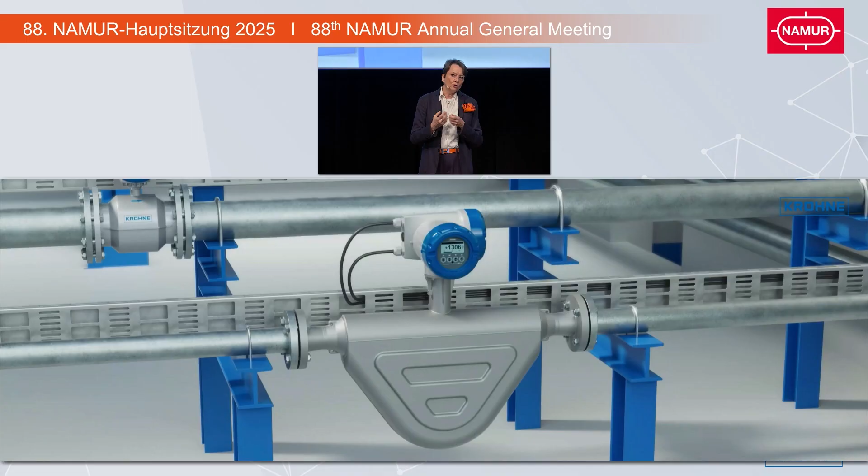In the examples from Evonik and Lanxess, we saw that a comprehensive correlation of data is a clear value added. Following this idea, we could imagine, as device manufacturers, that further measured values and sensors could be supplied with one single device by way of pressure, temperature, or ultrasound sensors. The established housing forms and installation length would not have to be changed, and the costs would not increase.

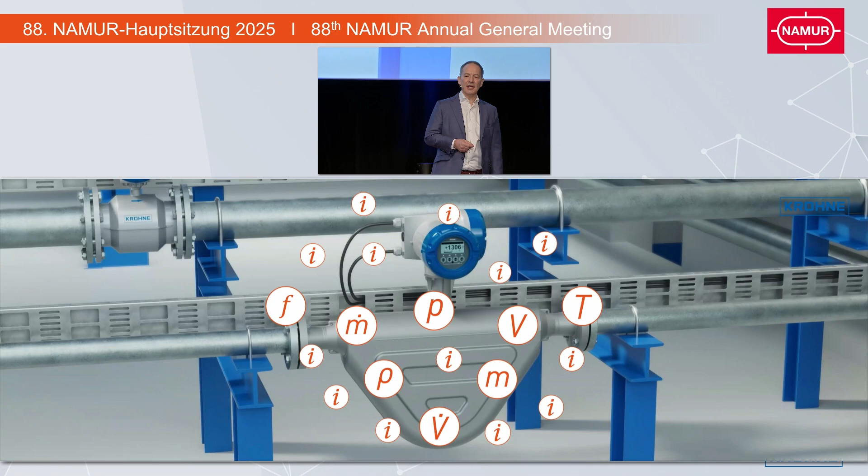So we use simple means in order to increase the number of primary measured values, and we multiply with the aid of an AI agent the number of process information. Measured values in one device mean fewer devices with the same number of measuring parameters. At the same time, we receive a different quality of measuring thanks to the correlation of different measured values and the evaluation by AI.

Thus, the measuring device in future will contribute to a situation where chemistry can control chemistry, as Thomas said. What would be the next integration step, Dagmar? First of all, I would like to express a yes, but. In order to be able to process all these pieces of process information and to derive predictive maintenance from them, we must also increase the computing capacity in field devices, which allows for the use of AI agents. The existing 2-wire technology and the permanently increasing processor performance are ideal prerequisites.

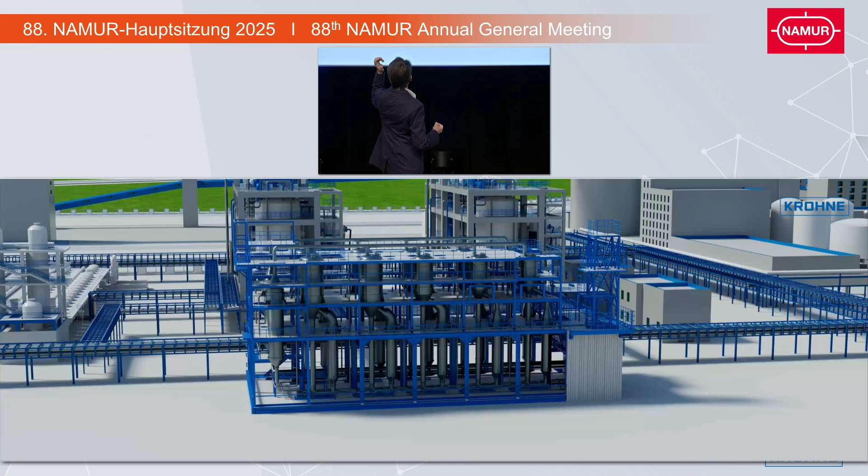Let me look into the future. Just imagine you could use the AI agent and communicate with a digital twin directly in a way you're used to from ChatGPT. The operator Sarah could, for example, ask the plant, can you give me some information about the operating status of measuring station FIC 4711?

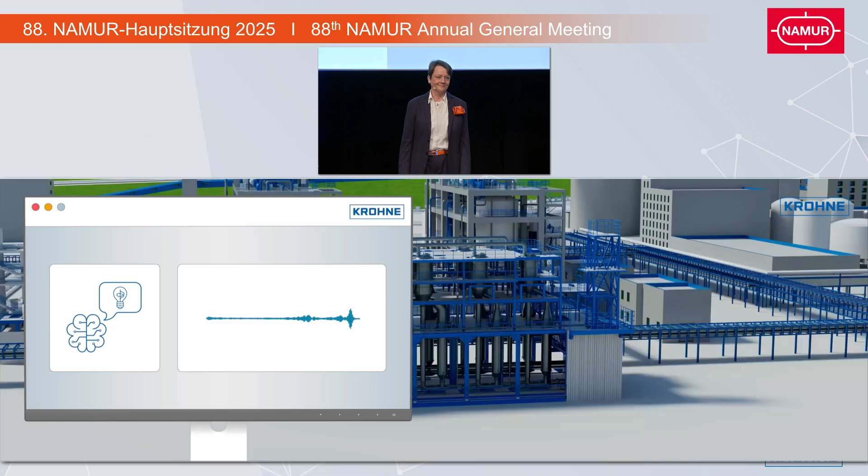Hello, Sarah. Yes, by way of analysis of my sensors, I do see that there's an increasing number of gas bubbles, and the downstream pump has a variation in the throughput and more switching activities. I do recommend reducing pump performance by 8%.

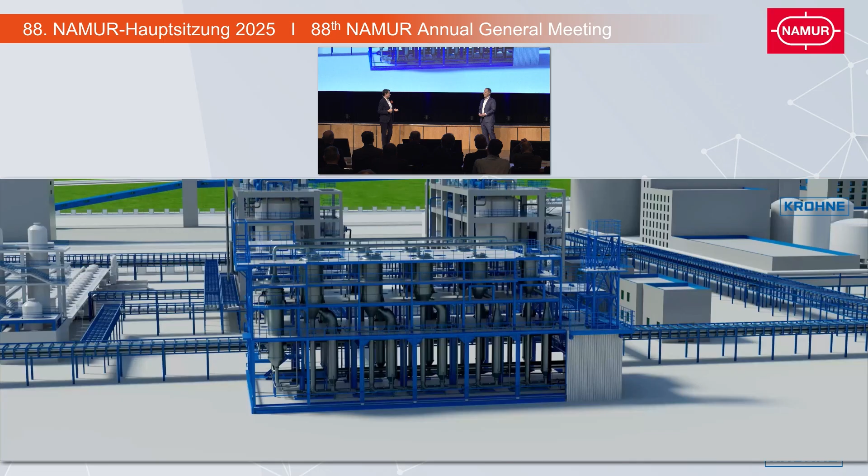In a second step, it could be conceivable to use the data from several field devices in order to construct one virtual soft sensor, which could even provide a deeper insight into process-specific aspects. All data from sensors, could they be combined with historical data of the same plant? If that is the case, we'll get a comprehensive database for the digital twin of such a system.

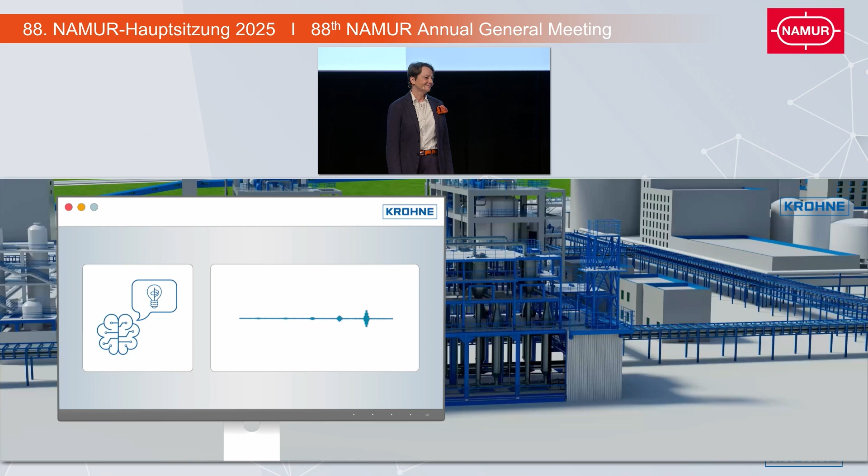Such a database is ideal for artificial intelligence. If the process engineer, Julia, asks the AI agent the following question: the heat exchangers show first signs of fouling, do we have to do flushing as planned or can we wait? Hi Julia, based on the current acoustic and temperature data of the measuring station, as well as the historical course of the last 12 charges, the fouling rate is still below the critical threshold value. A flushing can be postponed by up to 10 operating hours without losing efficiency.

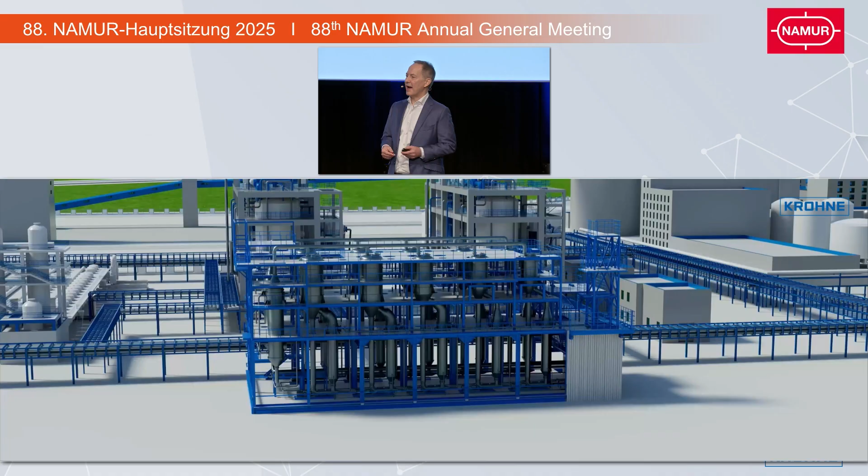Now, once we have gained trust in the quality of such answers, we will go a step further. If the AI agent recognizes suboptimal properties of a certain substance, it could propose automatically parameter adjustments or direct intervention in process control. And that brings us to the topic we started off with today: the path towards autonomous plants. In a third step, we would then end at a potential AI-supported simulation of partial systems based on the data of the digital twin of the plant and the devices. The know-how combined here could represent a clear value added.

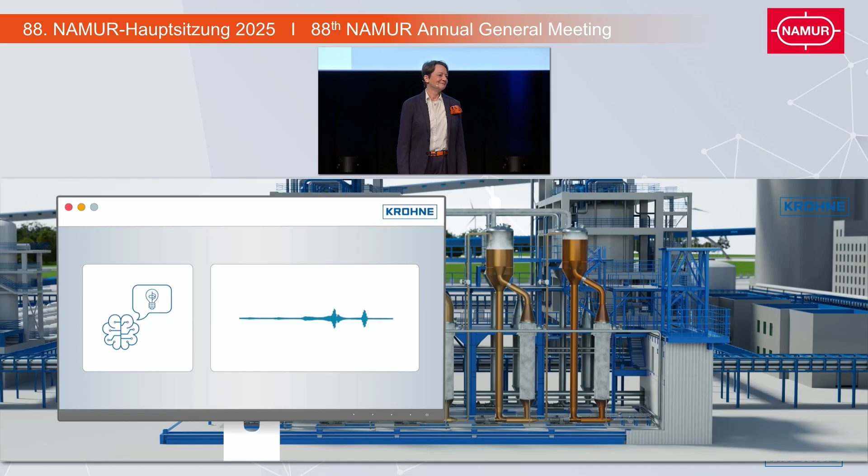Now, if for example the plant manager Zhao Long asks, do a simulation of 2% less steam inlet at the inlet stage 1. Hi Zhao Long, simulation shows 70% less deposits in the heat exchanger. Well, we can do better. Why not go for 3%? You see, our AI is further advanced. It even speaks Cologne dialect.

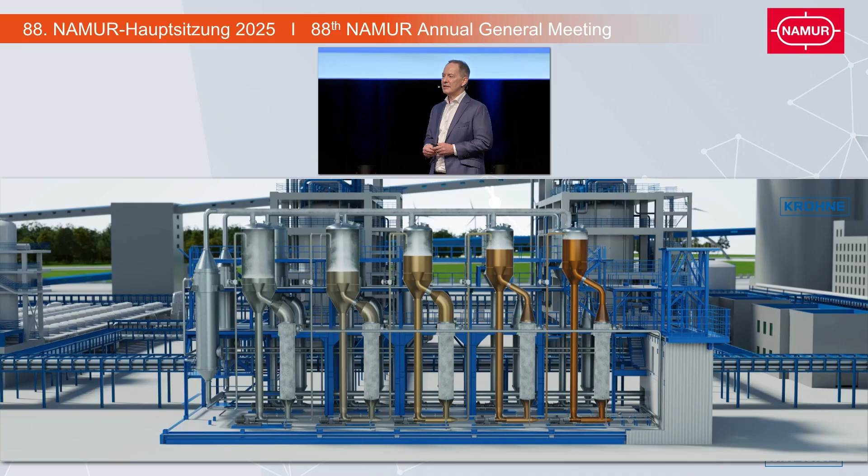Let me add, artificial intelligence would develop precious potential if the interplay between human expertise, intelligent measuring technology, and process know-how could succeed. The reliability of measuring technology has to considerably improve at comparable costs, and it can only do so with additional data. The basis for that is to have sufficient energy via 4-wire technology and communication, for example via Ethernet-APL, and they exist already.

If we want to boost this vision at well-proved speed, we'll probably need 20 years rather than 10. We can't afford that. In order to be successful, it has to happen at the latest in 5, better 3 years. Thus, we transform measuring technology from passive data collection towards active process intelligence.

Well, we supplied a lot of facts and showed a lot of findings. And we based ourselves on 3 milestones: connectivity as an underlying condition, beyond diagnostics in order to collect information about the process, and finally intelligence in every measure as our vision of an autonomous system.

We do need the autonomous plant in order to keep production and prosperity in Europe. The even faster implementation of findings requires a coordinated and synchronized approach between device manufacturers and plant operators. Measuring devices have to act as intelligent nodes in the overall system. Furthermore, we need a suitable infrastructure in the field as enabler. APL and 4-wire technology are crucial in order to make available the required energy and bandwidth for edge computing and an extended analytics in the field.